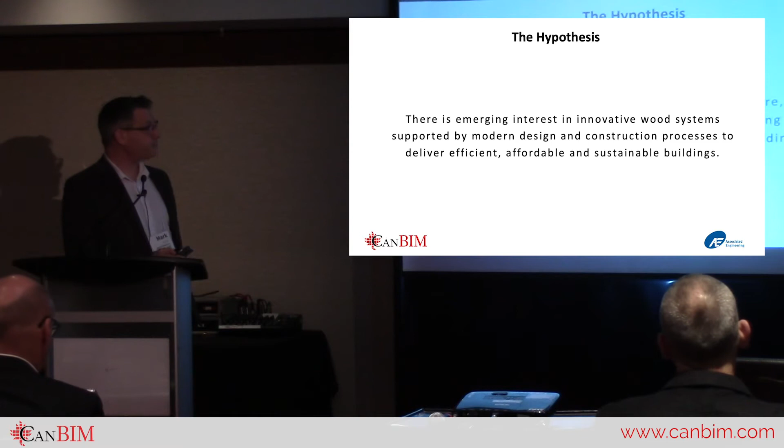Further to that growing interest, the next part was really that the opportunities for British Columbia's architecture, engineering, construction industry are particularly relevant, and that we can become, or are becoming, a leader in low carbon wood buildings, both in terms of what's being built in British Columbia, but also the export of our skills and knowledge. And then how do we ramp that up?

To ramp that up, what we need is leadership that requires prompt resolution of technical and regulatory issues. And those of us that have been involved in the wood world have seen that go on. And that means engaging with new technologies and processes.

I read this morning, just coming in, a post on LinkedIn that basically talked about the fact that there's an adequate supply of wood, there's an adequate growing number of suppliers, but there's a lack of growth of people that can actually manufacture and are skilled in the design for manufacture process. So it's a new set of technologies for the building industry that we've got to grapple with.

And because it's changing so quickly, the hypothesis was that we need to perhaps move away from the traditional consultant, maybe even contractor world, where we keep our IP close to our chest and learn again on each and every project, rather than sharing it in the broader community. So how do we facilitate that? Eunice will talk about what we've built in terms of the details as a sample of sharing that knowledge.

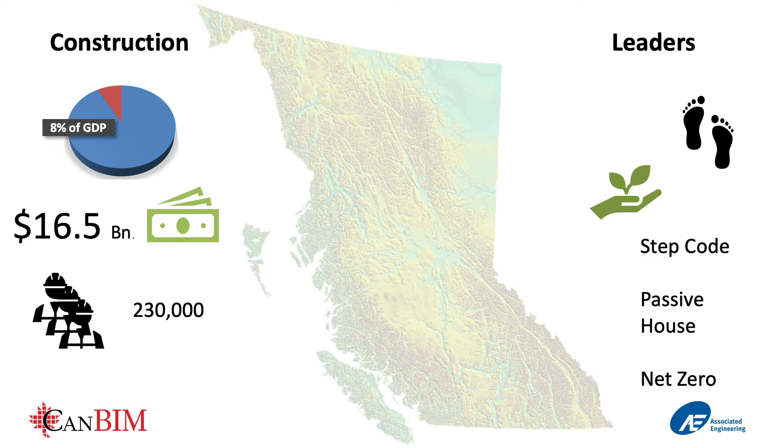Combine that then with British Columbia's reputation for being a leader in green and sustainable design. It's the first province in Canada to chart a path towards net zero. It has the most passive house projects in Canada, and it continues to move forward. The City of Vancouver is moving towards net zero, looking at embodied carbon, and embodied carbon is a really important piece

of the wood industry. So in order to move the industry forward, as we hope to, we need a vibrant research and development community, and FII, FPInnovations. There's a number of disparate bodies doing a lot of research in this area, and we're trying to bring that all together.

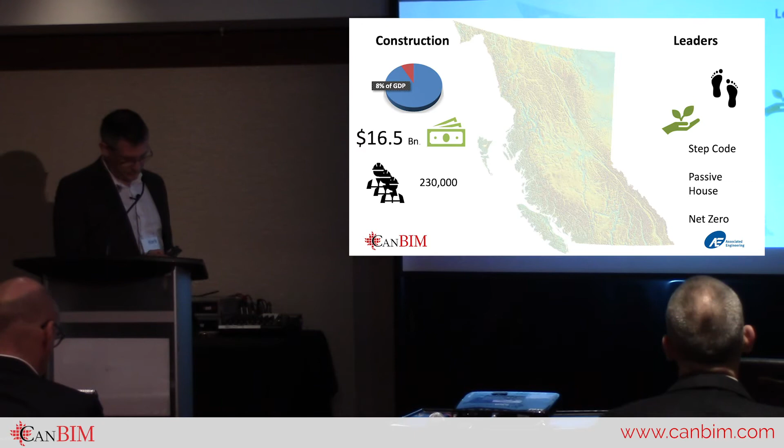The leadership position in wood is a fairly small community. Here in BC, it's built on a fairly small community of leaders in the industry. I think we all tend to know each other and rub up against each other fairly frequently. For it to really gain traction in every area, that needs to grow and broaden, and we need to fully engage with British Columbia's world-class wood design community, as well as owners and authorities having jurisdiction. So we need to invest more in innovation. And the hypothesis here is that if we can collaborate together, we can share our information.

Okay, any questions? So far, all good? So far, so good.

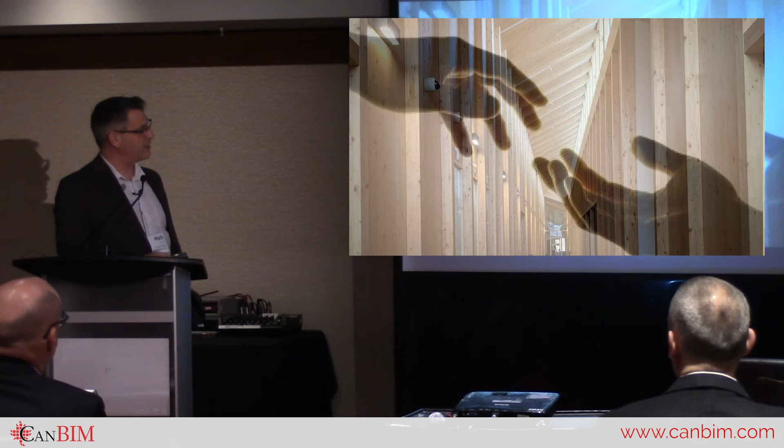Good. And so here we are, just a little image on the top of the wood project. Just out of interest, this is a wood project that we just completed a month ago, just got occupancy, and it's a research laboratory all out of CLT and glulam. It's one that I think we'll be pretty proud of. We can't say too much more than that, but it's in Comox.

And the wood, this probably encapsulates part of the challenge that we face here in British Columbia. The wood came from Europe because it was cheaper. So just to reinforce that, there was the workshop we did in September in Victoria, where you and a dozen structural engineers were in the room talking about investing in CLT from Europe as 200 logging trucks drove by protesting about mill closures. Yes. What's the macro reason for that?

Yeah, it's good. I think we'll touch on this a little bit later as well, but I think there's a perception that there's a lack of supply in the industry. Broadly speaking, there's only two manufacturers in BC, one, Structurlam. And Dave, I think there's a lot of perception around it. I'm not going to have that in my presentation. A couple comments on supply. Sure, go ahead. So David Bell was with FPInnovations, now with FII.

So in British Columbia right now, we have StructureCraft. I think we can hear you. Yeah, for the people in the audience, apparently.

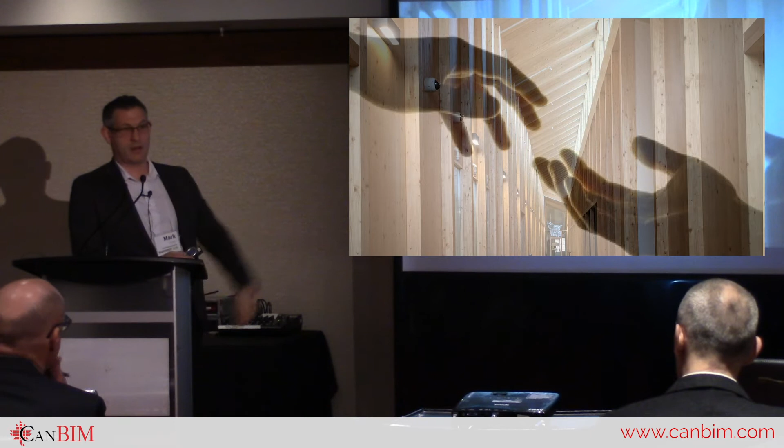And so I think that may change. This is my personal opinion. I think that may change things over the long term, because designers aren't picking a product; they're specifying a material. So it'll be interesting to see how that changes.

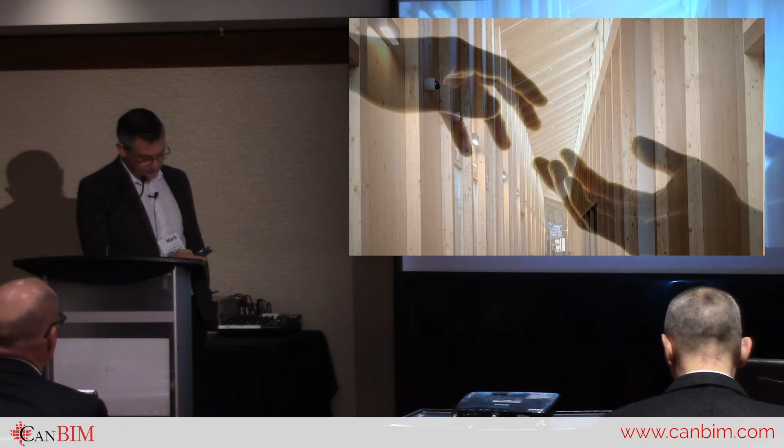Back to the project that we were part of then. So the first piece was some research in the market, and again, conversations, talking to people, asking questions. And then we tested what we found from that research in workshop settings, and we did two, I think, in the course of... Right. And it's ongoing.

This presentation today is part and parcel of that research, so we really welcome your thoughts and discussions. What's come out of these workshops is a set of details, and we have a copy of all of the details that you can take away with you. But it's really, if you like, being crowdsourced. It wasn't us that came up with those details. It was the participants in the workshop that came up with those details as solutions to issues that typically would come up in a mass wood environment in the biggest market share.

And so some of the things that came out of the research was this play between advancing technologies, the manufacturing plants, where we're moving towards prefabrication and manufacture as it relates to wood in construction, the consultant world, the contractor world, and then this need to share information. There's this push and pull and changing of the industry in terms of being open with the information, and yet at the same time there's this rapid advance in construction and the marketplace.

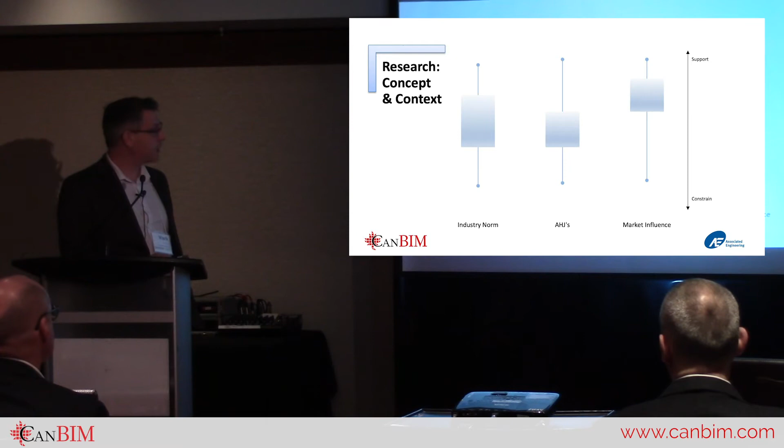Any kind of comments, questions, things that we've kind of missed? This came out of the research as these three buckets. And then, so that was kind of concept and context. What is the context that we're moving forward with this wood project?

The next one is the system selection, and this comes back to using the right concept for the building and the right material in the right place. And when we're looking at a system selection, all of these things play into that. The typology of the building, the pricing of the material, the product availability, the education of the team that you're working with, all the way through from the owner to the sub-trades. They need to all be on board with that.

Market awareness, building requirements. Here in Vancouver, as we'll see, we've got specific zoning requirements that can play into the effectiveness of using wood. So we need to look at all of those things as we move towards a wood solution and the trends there.

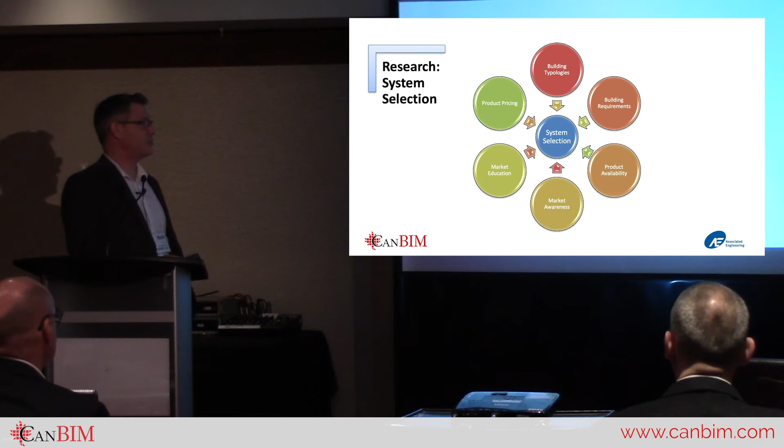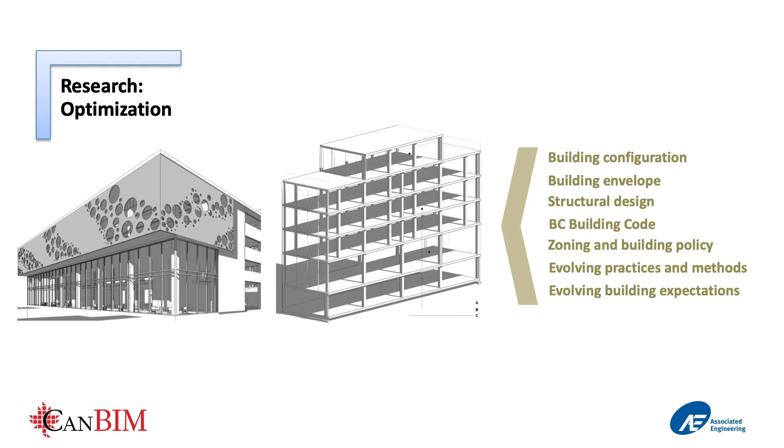And then the last piece that came out of the research was the need, once you've settled on the context and the system selection and said, yep, this is going to work, to ask how can we optimize the solution with respect to the building configuration, the building envelope, structural design, building code, zoning, building policy. All of these things factor into the end result, no different to any other typology or material that we use. But timber is a very different material to steel and concrete, and we need to design accordingly.

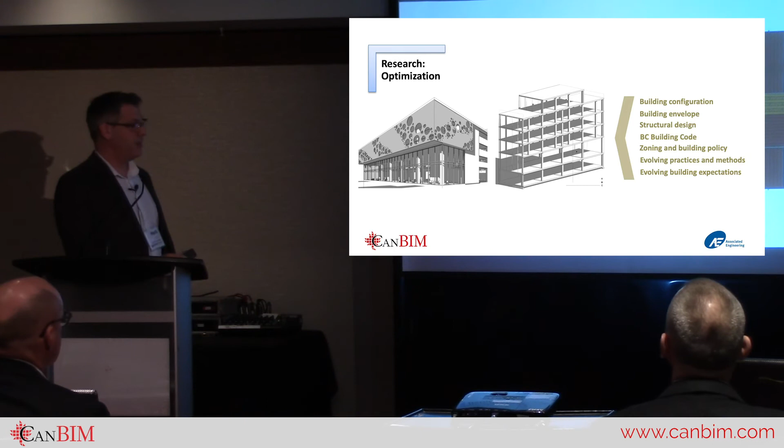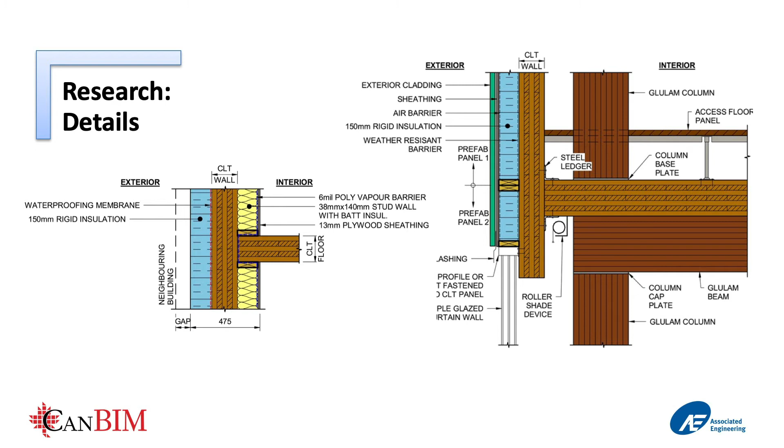And then the last piece that came out of those workshops, as we tested those things and did some research, was that there's not really a coherent way of sharing information and lessons learned from project to project. So how do we gather that information? One of the ways we focused on was your typical details, your interface situations where you've got building envelope with wood, floor to floor, noise considerations, those kind of things.

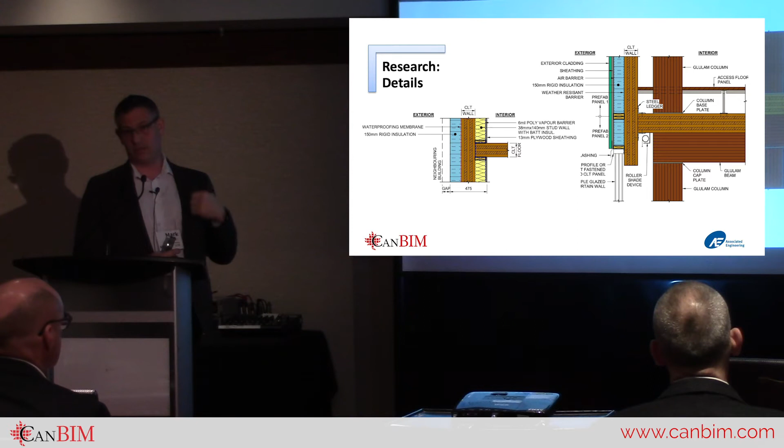So how do we do that? And then how do we open source that information and make people aware of it? Eunice later on will touch on where we think you could further share that information. All right. So that was the research.

Based on that research, we came to this: we should focus on those parts of the market where wood is probably going to have most traction. And whilst we at Associated deal a lot with infrastructure and smaller communities, the main market is residential, commercial, mid-rise, high-rise. That's where a lot of the material is going to be used. So for us, it was a privilege to be part of this, and be sponges, if you like, as we worked with some of these experts.

With the help of Helen, we picked 4 case studies for the workshops. Really the workshop was designed to test those buckets. Does that make sense? Where are the barriers to adoption of these emerging trends? So we picked a 6-story mixed-use residential in Vancouver with the zoning requirements, but also the supportive authority having jurisdiction, and how would that interplay?

A 4-story multi-tenant office in Victoria. Victoria was picked, if I remember rightly, because it's a high seismic zone. And no, that was Surrey, I think. Yeah. 8-story seniors residence in Surrey. Poor soil, on the floodplain there. And then a 4-story mixed-use commercial building with a supermarket.

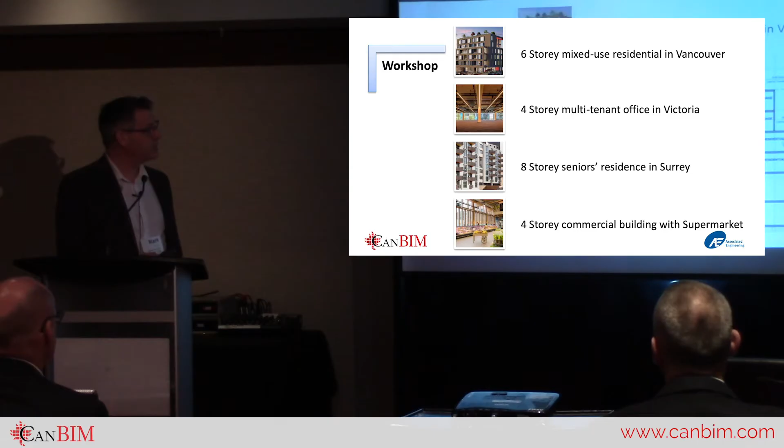I'll just quickly go through some of the plans to give you some context, and some of the challenges that we addressed in the workshops as we try and do these things in wood. So the 6-story mixed-use residential, fairly typical with the setbacks. 6 stories now allowed by code. In fact, it's soon to be 12 if it's not already 12. And so we have to deal with these kind of things.

So we put a daycare on the roof, which was pretty consistently nixed in every workshop as a bad idea with a wood building because of sound issues, fire protection and things like that. And so it comes back to that context. If you're going to design it in wood, how do you deal with those kind of issues? Get that sorted early on, right?

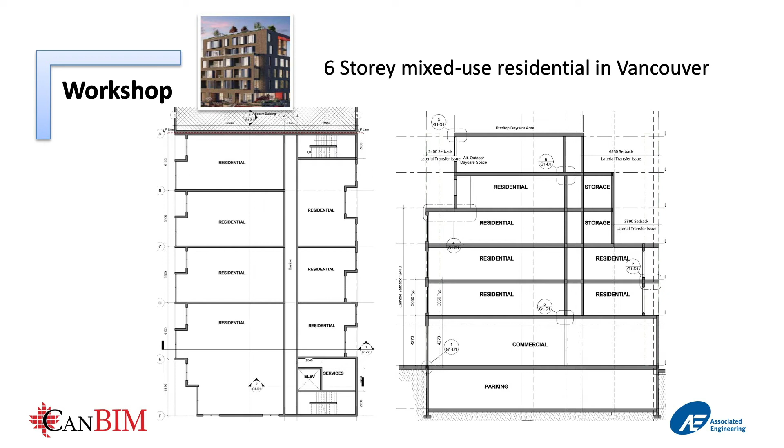Setbacks, so you've got transfer systems, building envelope issues as you transition from external balconies to internal balconies, and how do you deal with wood systems there? And I think this one had a zero lot line. Again, so how do you deal with that? Just checking my notes here to make sure this was a passive house too. Yes. So how do you deal with that thermal zero lot line, prefabricated system of building, mass timber? How does that work? Does that work? Is it practical? Is it feasible?

Yeah, so some of the things that came out of that were the daycare on the roof I already touched on, the setbacks required by the Vancouver zoning bylaw, alternate solutions for passive house zero lot line. How would we get around that? Thermal performance at the transfer slab between residential and commercial occupancies, where the transfer floor meets the elevator shaft, seismic design, and then the blindside passive house timber firewall assembly.

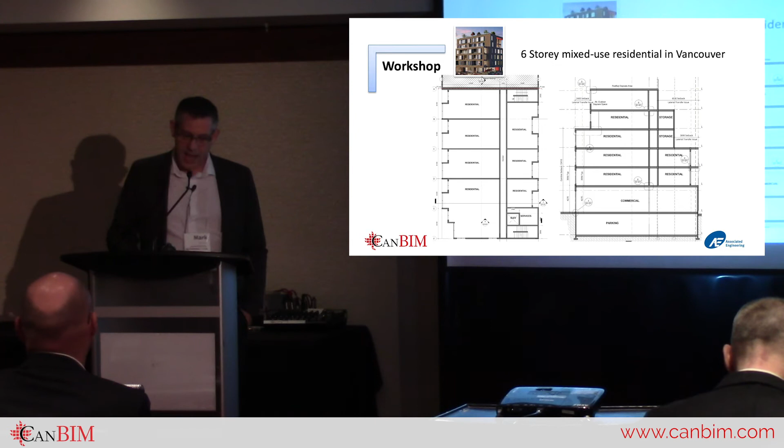Did you actually resolve some of these issues, like, through the workshop? Yes. Fire assembly? Yeah, we have a set of the details in hard copy there, and we did resolve them. I think there were probably around 25 to 30 people. Architects, engineers, contractors, code consultants, building envelope, and really crowdsourcing at its best.

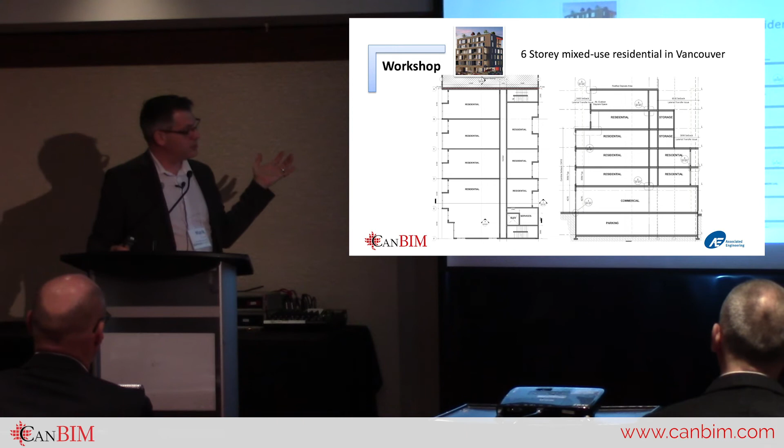Are they final? Are they complete? Probably not, but they're a base point to start with. And as you'll hear, the hope is that we can continue to build on that community. And what was interesting was, I think generally there was very quick consensus that it could be done, but we just need to consider it from a wood systems perspective.

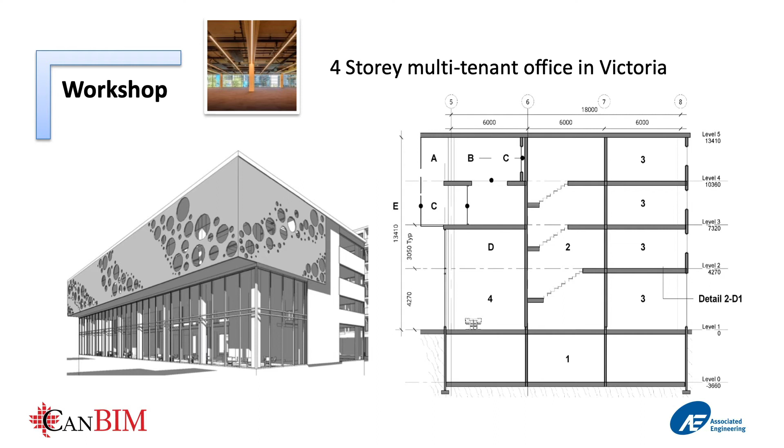This was a 4-story multi-tenant office in Victoria. Victoria was picked because it's high seismic, and that tends to give challenges around transitions from the diaphragms to the cores. From a structural perspective, you've got a high seismic zone. You're going for a timber core. How does that affect the core design? Is that possible? Is that feasible? And then introducing wood design into a building typology that's primarily been built out of concrete.

And here, this one, I think we completely redesigned. This one was, I guess, with an atrium in the middle of it, kind of a typical commercial, multi-story, big glass front glazing. And what came out of this loud and clear was, for this to work in wood, you really need to configure it differently. It's almost too difficult to do it as is. And so that was really interesting.

Again, speaking to that, the constraints here with that atrium, with fire protection, with all kinds of different issues going in there, in-floor services, envelope implications, the protection of wood. It becomes challenging, and so we need to rethink it if we're going to do it in wood. Not to say that it can't be done, but that was kind of the message there. So that was fascinating to see that come through.

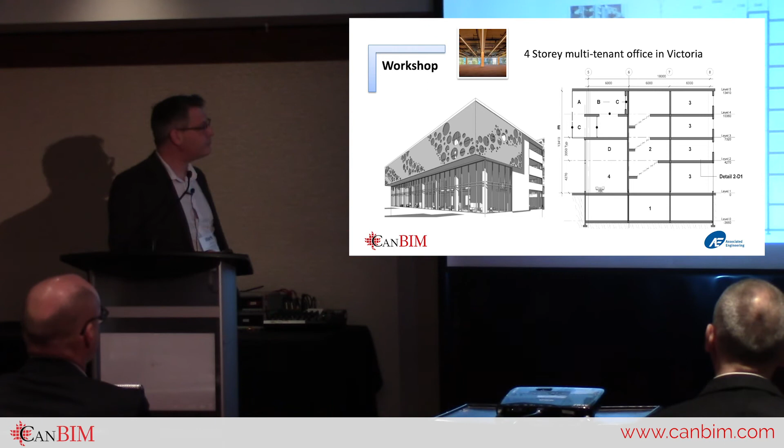One of the comments I've written here is that this project represented how past design and construction assumptions work against the potential benefits of wood. It doesn't tend to work if you come with a building layout that's set out for concrete and a commercial expectation, the column patterns set out on a commercial space expectation, and then you just try and fit wood into it. You have to rethink the system. So really that decision to go wood should be made earlier on. Right. Yeah. So the consideration between two materials needs to be made.

Yeah, exactly. And I think this will come out a little bit later on. The drivers behind the decision, what's driving that decision, and how important is it to the owner? Is wood just a nice to have, or is it actually a fundamental design philosophy? Because it will change the expectation around that building. So you mentioned you're going to talk about that a little later on? I'll touch on it. We picked out some of those things going forward.

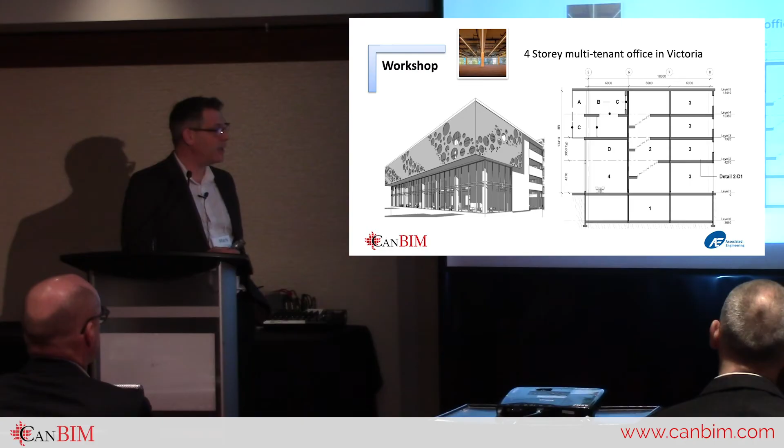Yeah. So this one perhaps speaks to the advantages of wood in a different way. This one was 8-story in Surrey.

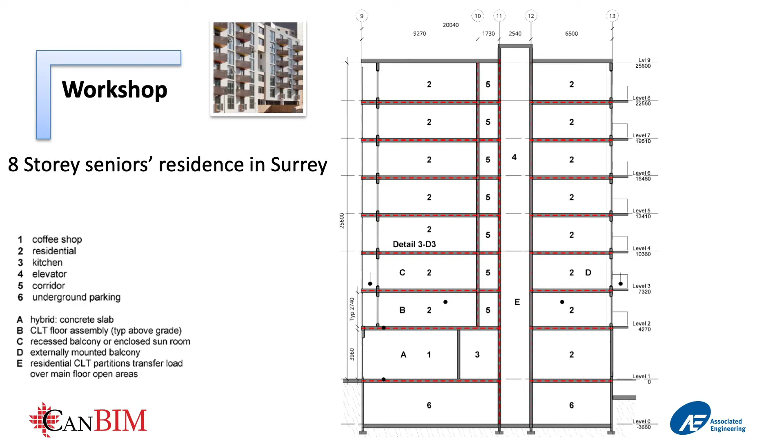So the case study, and bearing in mind that these were meant to be realistic, but they were case studies, so we kind of threw things in there just to test things. So this was poor soils, and there were a couple of potential advantages in moving to a wood system. One is that it's lighter than the concrete system, and so if it's lighter, the thought is, well, okay, that's going to help with the foundations, but maybe we can get an extra story on there too if we're clever.

So how does that work? And does a wood system lend itself if we use a tighter column spacing with just flat plates for the floors? Does that help us at all? And we explored that. So the poor bearing strength of the site soils meant that additional foundations may be required for a concrete building. The height restriction, maybe we could get extra floor space in here if we're kind of good with that.

But then because it's a residence, and this came up a number of times, was that interface between the balcony and the internal space, and how do you connect that with the envelope? That's a common issue. Doesn't matter what material you're using, but with the wood, how do you protect the wood in a satisfactory way?

I'm not sure that we really solved the extra floor issue. I think we got focused in the workshops around those details, the interface details. We had a couple of ideas. In fact, there were some really out of the box ideas, but there were one or two that will be in that pack that I think are a good starting point for sure. And then here there was talk of how flexible is this in the future if we want to change use.

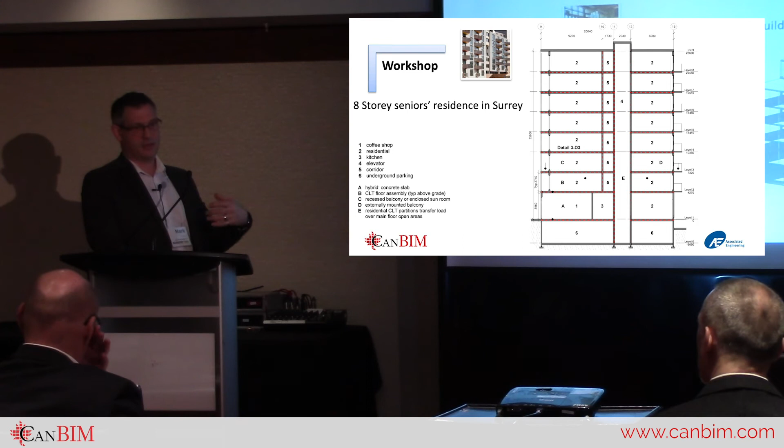And that really goes even with the metal connectors. Increasingly, you're trying to hide your metal connectors inside of the wood. Right. But the perception, and it comes back to that market awareness and owner education, is they see the fires of the mid-rise stick-built things, and they think, wood burns. Sure wood burns, but it's predictable.

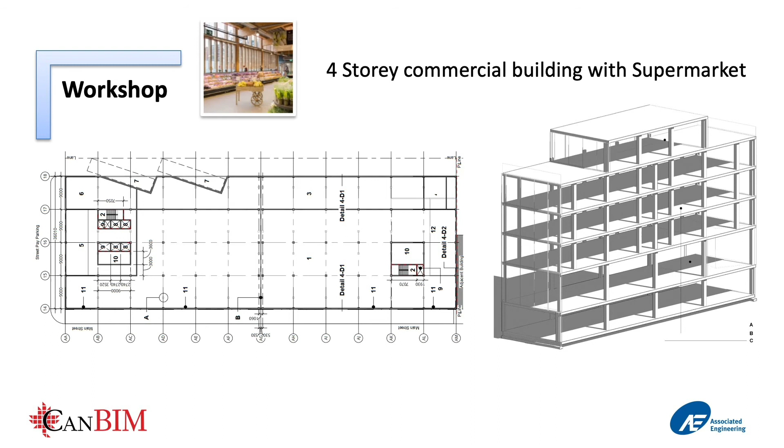And then alternative solutions for the two types of assembly, commercial space over retail space, thermal performance, noise, vibration, and structural layout adjustments, things like that. There's also the hybrid solutions, which are infinite. Hybrid solutions are quite useful in this application too, where if you've got long span, you keep it in concrete or steel and go up with wood when it becomes feasible. Absolutely, I couldn't agree more, and that's what came out loud and clear in the workshops: let's think about this holistically, hybrid. Yes, we want to use wood, but in the right place, and that will actually lead to greater adoption, I think.

So there's quite a bit of considerations around construction and logistics and material handling as well. I was involved with a project where the spec required that the contractor maintain 45 RH for the material during construction. The building's not enclosed, so how do you do that? You build a tent and build inside the tent. What's RH? Relative humidity. Because spikes in humidity can cause the wood to have checks and splits. And if it's a really terrible split, it can potentially destroy the integrity. And of course, checks are not attractive. So the spec required us to maintain 45 RH during construction.

Stuff's wrapped in plastic. That was interesting. And if you change it, control it slowly so they can come down, etc. So there's material handling constraints. You got to store this stuff in a dry facility until you're ready to install it. You got to keep it wrapped. And then you might end up taking on an unenviable liability to maintain certain conditions. Yeah, for sure. That is one of the challenges where I think we should look to Europe a little. Europe tends to build under tents, but that's quite expensive here, right?

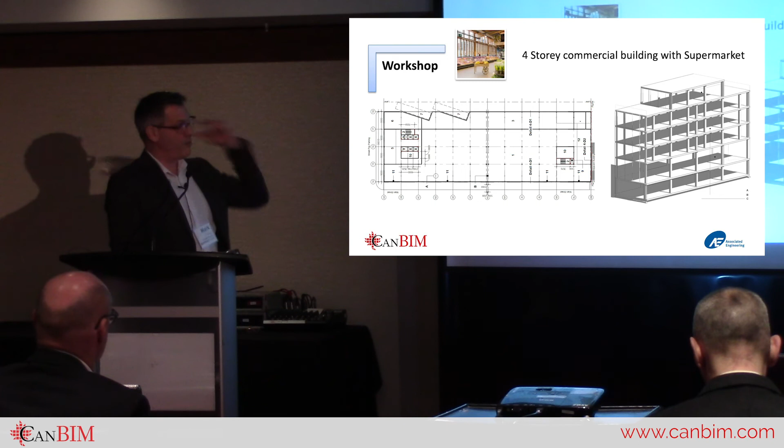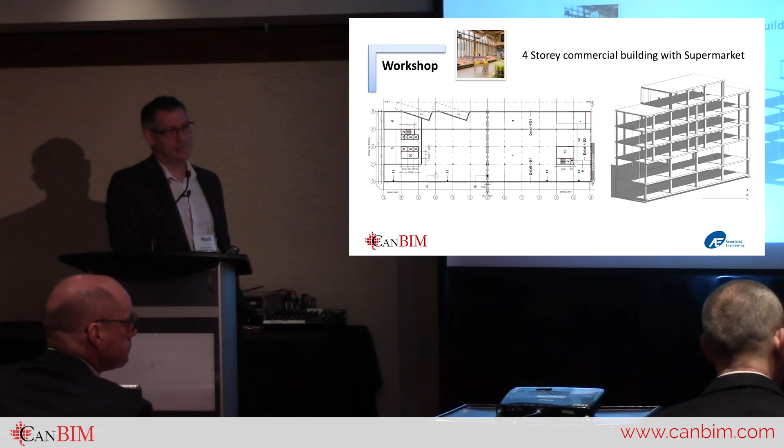They will. They're targeting 12% moisture content in their wood. Typical kiln dried wood would be 19% for stick frame buildings. So they're getting it dried down to 10 to 12. Your service conditions are going to be in your sort of 8 to 12. But getting into the Yukon in the winter, that's extreme. It may be lower than that. Yeah. So they try to mitigate it through that. If they acclimatize their material all the way up.

Yeah, to some degree. Now, keep in mind this whole discussion around the UV and even the checking. When we talk mass timber, most of it's going to be covered. Yeah, that's what I was just thinking. If you have a very wood forward one where your CLT panels are going to be uncovered, that's one thing. Most of the time, it's your glulam beams that are going to be uncovered. So you can be more strategic in what you treat with kid gloves. Yeah. I think we all know it's a natural material. You'll see some checking.

We had some other issues arise, like cumulative drift tolerances, because the connections are slip critical, so there's no wiggle room. Interesting. Building a facade over the city block with slip critical connections, we had drift start to accumulate across the facade, and we're applying a glazing system to that made out of aluminum. That has a tighter tolerance, so across the facade you start to see the aluminum and the wood depart from each other. Interesting. We resolve that as we go forward.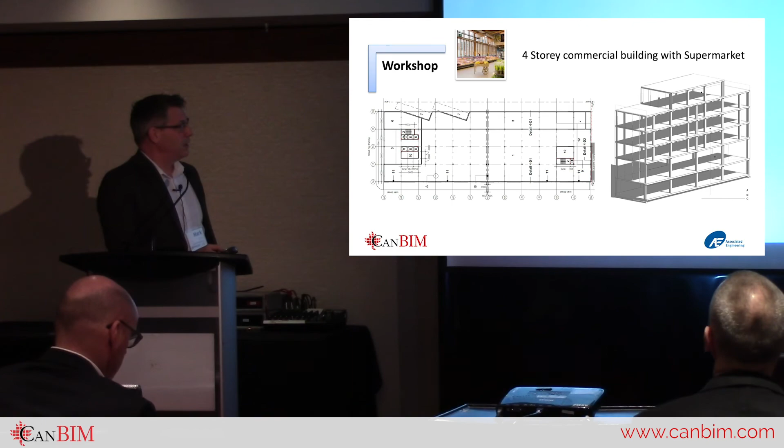All right. We're getting to you soon here. This is great. I thought I was going to struggle to go for an hour and a quarter. This is fun. This is awesome.

So then we looked at what were the solutions for these things, and we've touched on a whole bunch of them, so I can rush through this. Around concept and context was developing a holistic understanding of wood and how it works. And understanding the code limits of the place that you're working in, making sure that you're not putting unnecessary barriers in the way right from the start. The holistic understanding: material, structural characteristics, constraints, broad design, construction strategies. Making sure the whole team understands that from the get-go is really important.

And then build awareness with owners. I've put up here knowledge, learning, training, coaching, but just build awareness through open forums, ask all of those questions you have, build some confidence in what you're doing, and opportunities, advantages, prefabrication, modularization, and how we deal with that over time and share the lessons learned. I'd hate to see this industry keep things to themselves and not be open about the lessons that have been learned along the way.

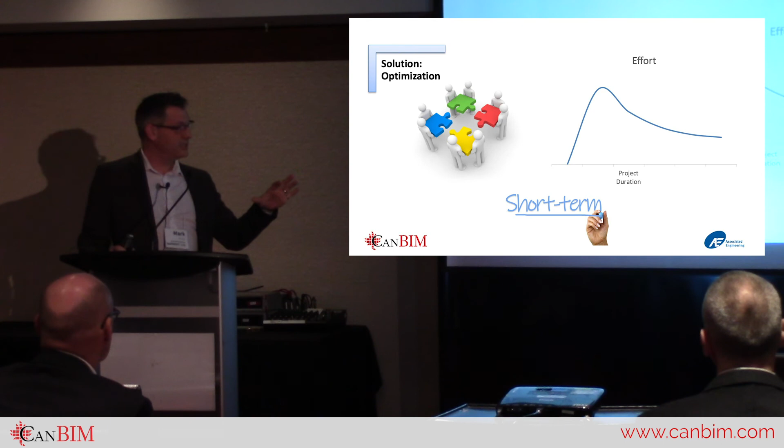And then out of that came a long list of recommendations, which is in the report, and we'll show a link to that. But one of the things that came out of that was this development of details that came out of the workshop as we try to wrestle with all of these things. How do we solve that? And so the recommendation there was to build a culture of information sharing, organize that information effectively, including organization of the innovation and the ideas and crowdsourcing, and develop a bit of a component catalog.

And this project was backed by FII. And so what they've done is they've hosted this on their website. The report is there, and the details are there, and Eunice will speak to that in a minute. But the hope is, and the intent is, and it'd be good to get your feedback on this, that this becomes a collaborative effort, an iterative effort, as we build knowledge and we can add notes to it and things like that.

And so with that, I'm going to hand over to Eunice, because she was the one that did all the hard work in putting all of these details together. And she's going to talk a little bit about what we've done on the website and how we built up the details and show you some examples, but then also forecast a little bit about what we might want to do with that in the future.

So just bear with me while I switch my microphone. Let's just click that one, yeah. Put that in the pocket. All yours. Hello, everyone. My name is Eunice.

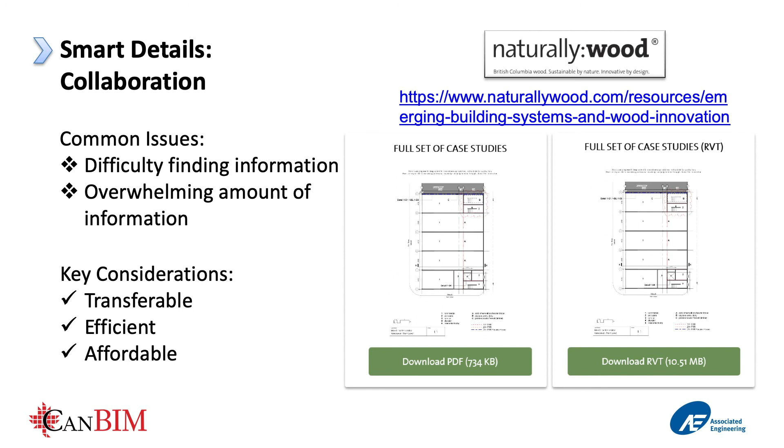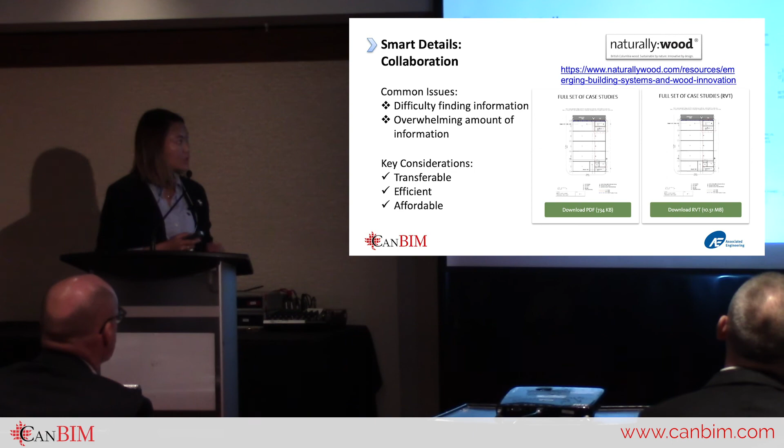So the link up there can take you to the full report of the study, and you will have the opportunity to download the full PDF study with all the details, or you will have the option to download case by case if that's your interest. Also, there's a full Revit file in 2018. In there, you can find all the smart details for all the case studies. So these are just an example of all the details you can find in Revit, as well as these handouts.

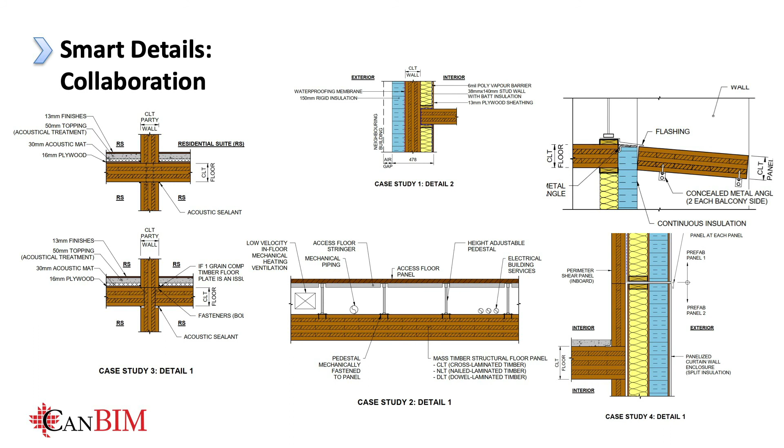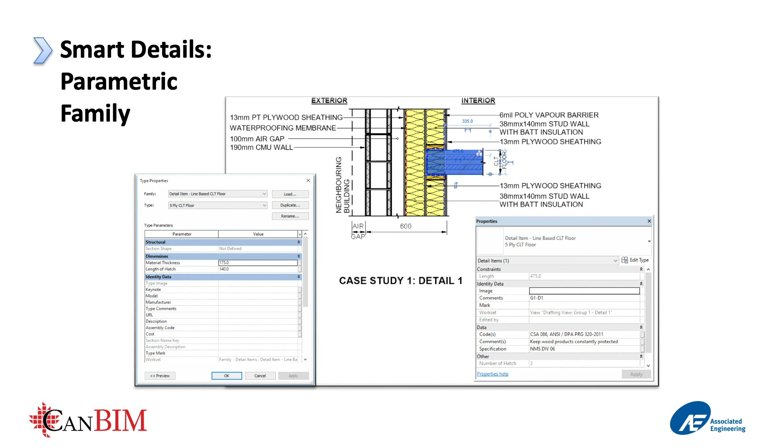This is just one example of how any of the families is going to look. For example, the 5-ply CLT floor: all the details were created in drafting views, but instead of using annotative lines, I made them using detail items, such as line-based families or generic families with regions. So they have the colors, hatches, and all the graphics that you want.

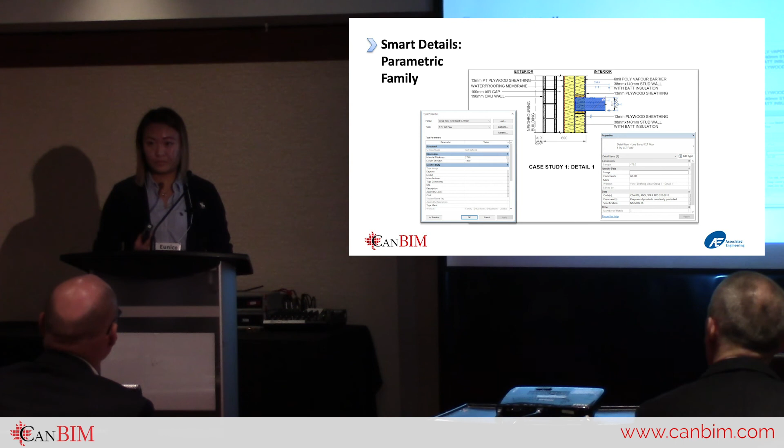On top of that, I built in the parametric values. So in there, you'll find the material used, its length and width, any suggested manufacturer, and you can also put in the supply unit price by linear feet or dollar by square feet, as well as any of the code requirements, specification, or additional comments from the professionals.

So now that the details are not just annotative lines, we can easily extract their values and use them in calculations. Once you pull all the details into your Revit models, you can use Dynamo with Revit to easily extract all the data you want. Using the extracted width and length, I can calculate the cross-section area for materials and multiply that by the distance of the details in the building. I will have the material values.

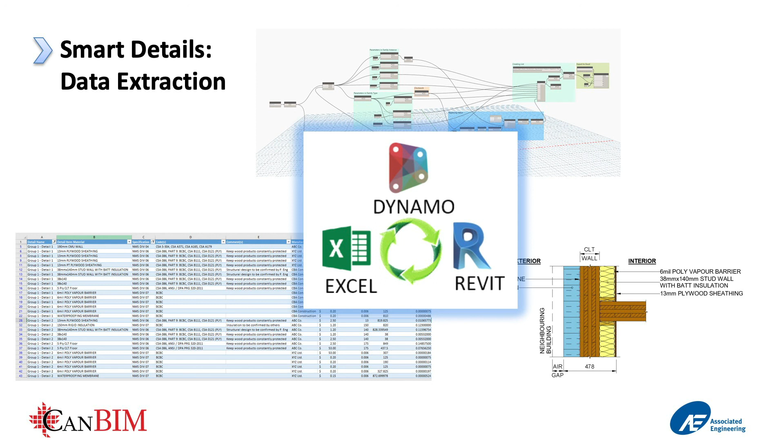And since you have the suggested manufacturer and your unit price, you can easily figure out your cost estimate for quantity and material use. For business, this is a good way because you will have data to support your project proposal, and designers can easily use this information for conceptual design analysis.

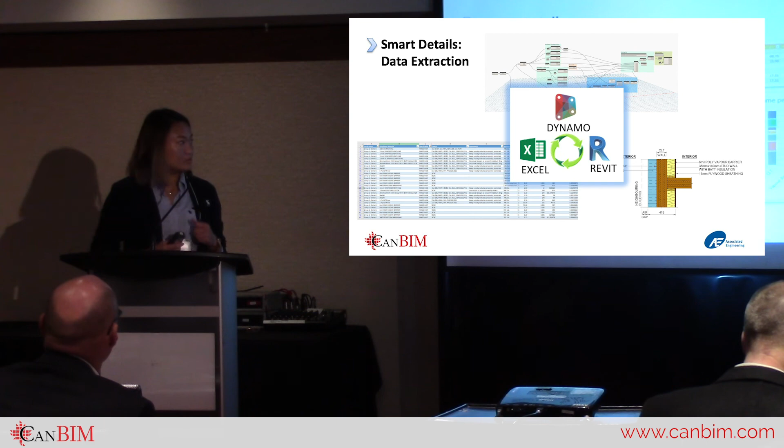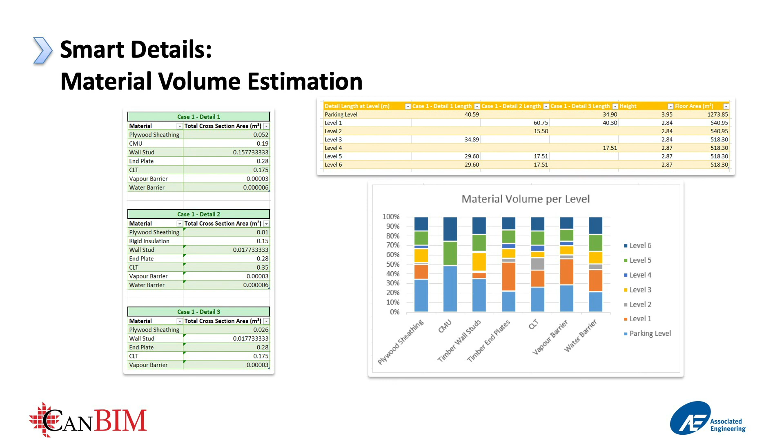And since we have all the material values, we can use them to run an embodied carbon report using a lifecycle assessment. On the left-hand side, the green table, I did a sample model. I pulled in 3 details, 1, 2, 3, and from there I calculated the total cross-section area per material in each detail. The top right is the distance per detail per level. With all those numbers, I can come up with all the materials within the building per level.

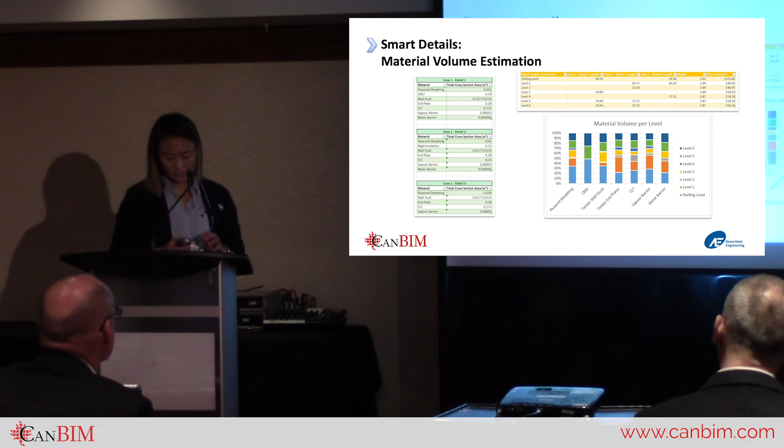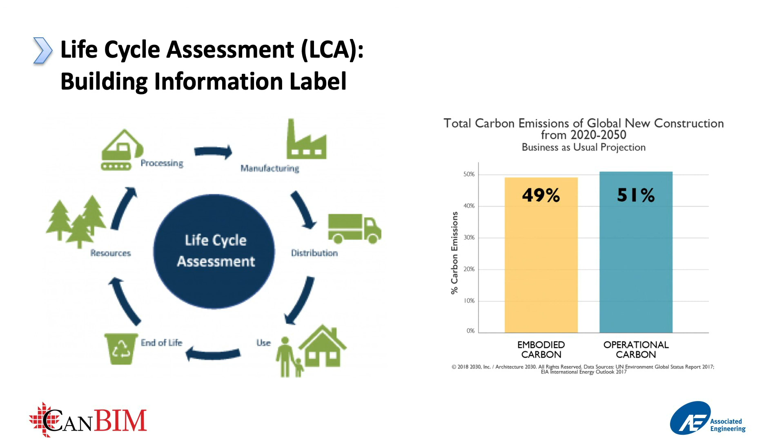So what is lifecycle assessment? It is an analysis technique to assess environmental impact associated with all the stages of a product's life, from raw material, processing, manufacturing, distribution, to its end use. There are 2 common carbon emissions during construction. One is embodied carbon, which you generally find from the structure and building envelope materials. The other is operational carbon, which generally comes from energy use, water reuse, biogas, from the electrical and mechanical equipment.

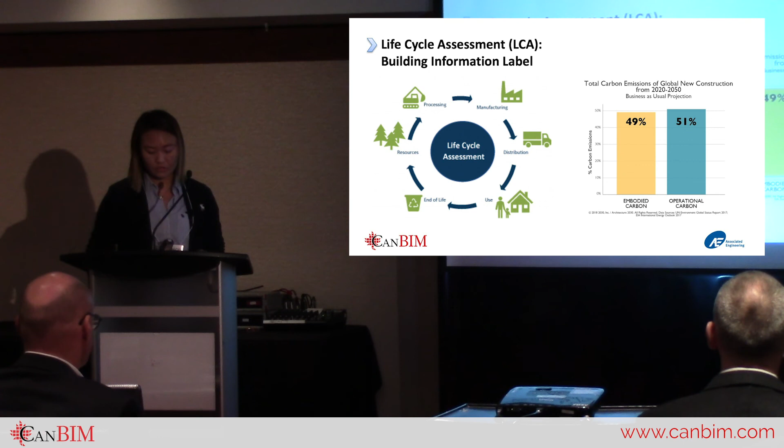At Associated, we're passionate about building communities that are vibrant, healthy, and resilient, and supporting economic growth. Sustainability is part of every project we undertake and how we operate our business. We recently launched a building information label system to measure and track the embodied carbon and operating energy of a building. We want to start building a database of all the embodied carbon we calculate compared with the actual greenhouse emissions.

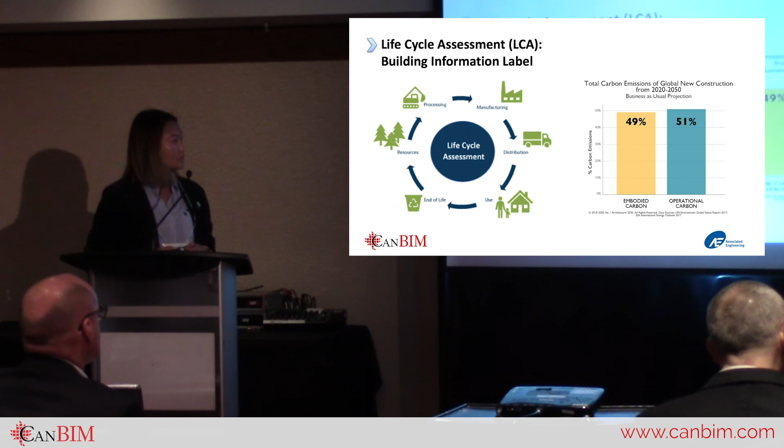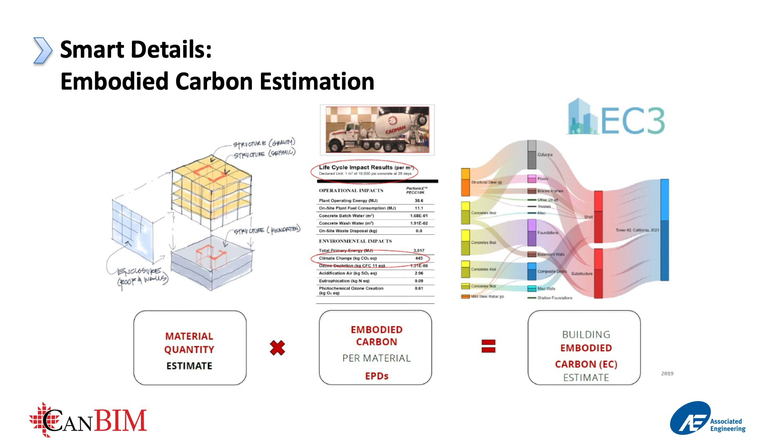So here's a simple equation for how you calculate embodied carbon. Since we already have the material quantity estimation, we multiply that by the embodied carbon per material. Then you'll have your full estimate of the whole building's embodied carbon.

It's similar to calculating the operational carbon. What you need instead is the volume of the space, the use of the room, and then your design equipment list. After that, you have to determine your equipment fuel type. For example, natural gas, biogas, or electricity will have different emission rates, in kilograms CO2 emission per kilowatt hour. Once you have all this information, you can come up with your estimate of the whole building's operational carbon.